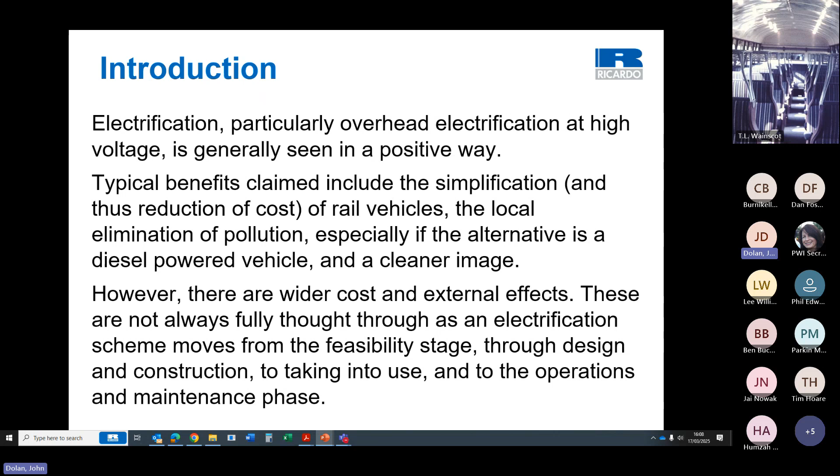However, there are wider cost and external effects. These are not always fully thought through as an electrification scheme moves from the feasibility stage through design and construction to taking into use and to the operations and maintenance phase.

Starting with implementation issues. Typically, physical implementation requires significant disruption to train services over months, if not years. This can destroy the rail market on the route and thus, potentially, electrification's own business case.

For example, electrification of one commuter route required the suspension of evening and weekend services, forcing passengers to use alternative modes of transport. As the electrification works coincided with the recession, those other modes were not crowded, and there was a degree of modal shift away from the railway that took a long time to recover.

Although it is now the practice to install signalling assets that are designed to be compatible with future 25 kV overhead electrification, this was not necessarily the case in the past. Therefore, where electrification does not coincide with resignalling, there can be a significant amount of work for the immunisation of the existing signalling, including, in particular, changes to track circuits.

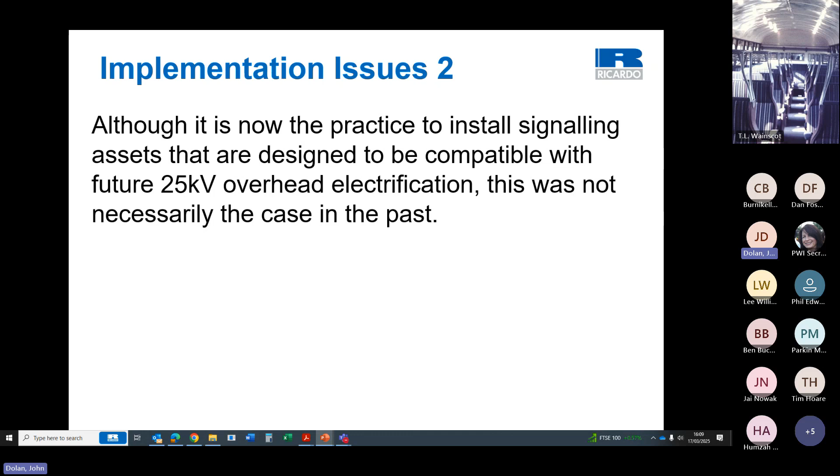The design life of a bridge is typically of the order of 100 to 120 years. Some forms of bridge, such as brick and masonry arches, can, if the foundations are not disturbed, last much longer. When electrification requires the reconstruction of bridges, it has to be recognized that there is a cost in environmental terms of destroying bridges with decades of remaining life.

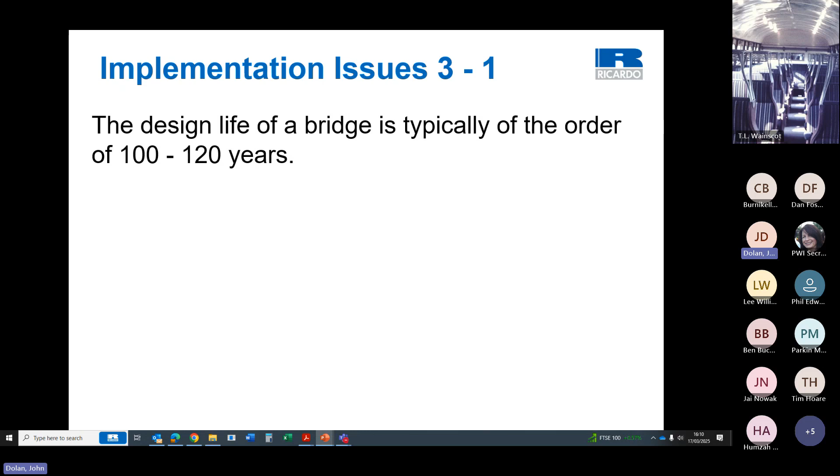There does seem to be some potential for a former practice. The London, Brighton and South Coast Railway electrified much of its suburban service in the early years of the 20th century, using a 6.7 kilovolt AC overhead system. To avoid reconstructing certain bridges, there were dead lengths of contact wire.

This concept is now being promoted as an innovation, although recent experience is still limited. The trains could deal with quite a long dead section. Up to 60 metres is recorded in Hamilton Ellis's The London, Brighton and South Coast Railway.

Great Western electrification introduced the concept of combining surge arresters and insulating coatings at the Cardiff intersection bridges, avoiding difficult reconstructions. It will be interesting to see how the coatings perform over the years and how often they have to be refreshed.

In that context, there is also a need to ensure that the insulating coating or an equivalent remains on the market. Incidentally, this is now a standard Network Rail solution and has been used recently on a lot of structures on the Midland Main Line.

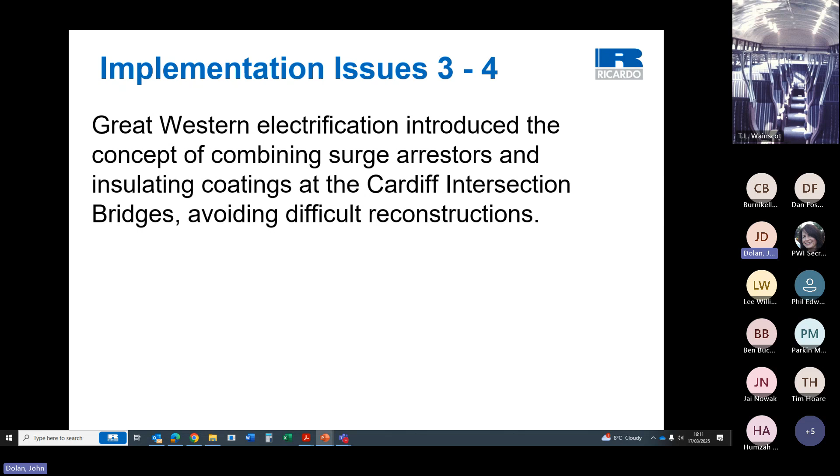So these are some images of the GLS coating and the NR accepted surge arrester. It's taken from material supplied to Ricardo Certification. We were the assessment body. In fact, I was the assessor in support of Network Rail's safety justification.

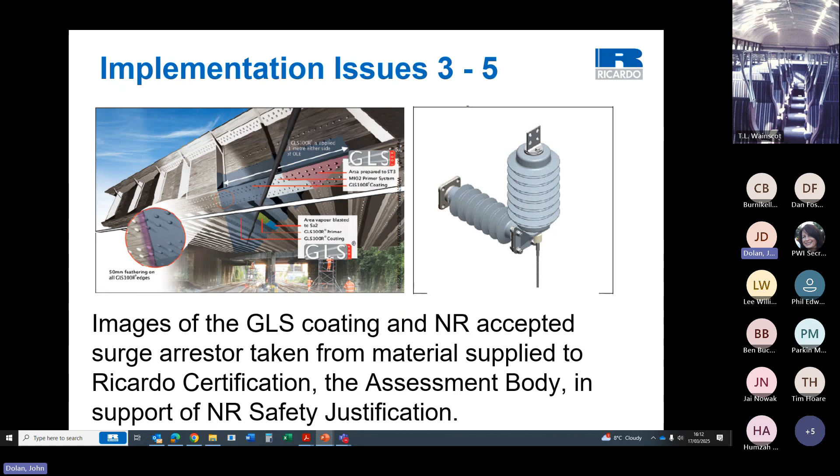One alternative to bridge reconstruction is track lowering, where, as is often the case with older bridges, the abutment design relies on the presence of passive earth pressure on the lower face of the abutment for stability. The abutment needs to be underpinned. Unfortunately, there is usually also a need to modify the drainage to avoid the creation of a sump.

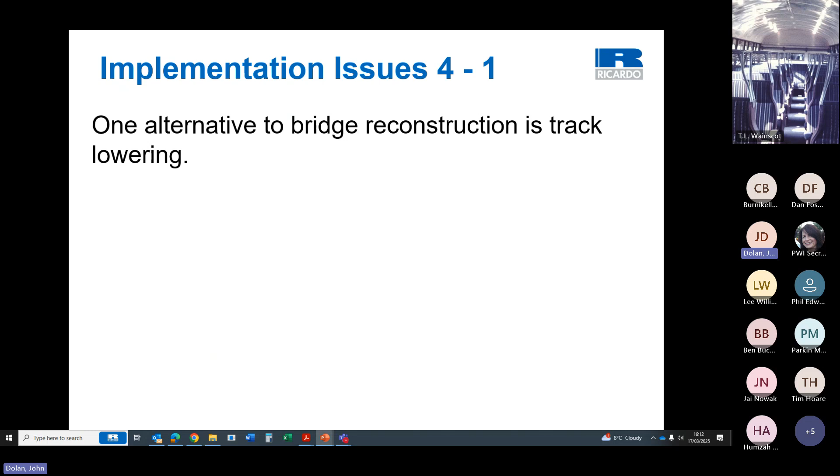Track lowering adversely affects the track top profile. On a higher speed line, there is a need for long run-ins and run-outs to comply with the relevant design parameters and to avoid the creation of a permanent speed restriction.

This work inevitably requires possessions longer than the maintenance white periods and, not infrequently, temporary speed restrictions whilst the new track profile is created. As with bridges, there is a cost in environmental terms of changing an existing asset configuration with remaining life, generating ballast and track waste.

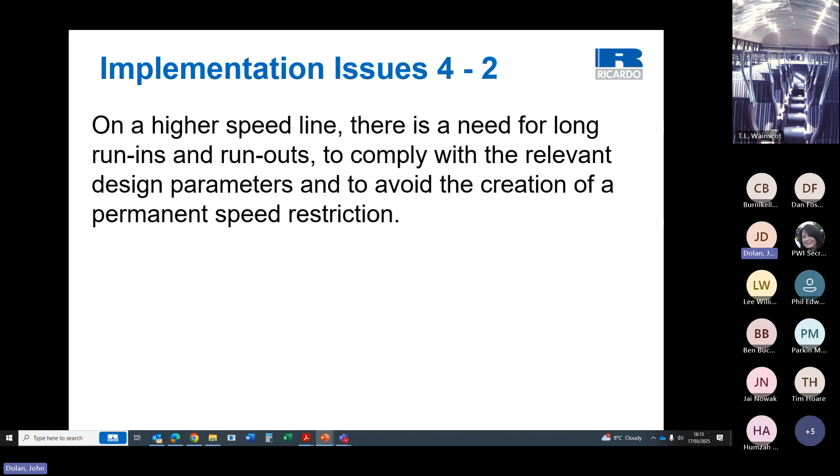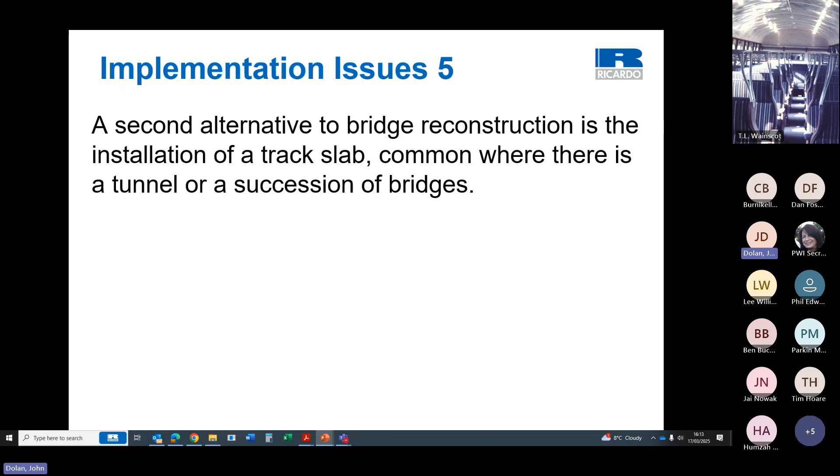Electrification also requires a significant earthing and bonding exercise. It is necessary to consider all existing metal structures, including footbridges, line-side fences, station furniture, etc. At metal bridges, the risk of dangerous touch potentials must be eliminated.

So moving on to the increased need for on-site work. Whilst rolling stock can be maintained offline in warm, covered accommodation, protected from the weather, with plant, tools, support, etc. to hand, electrification assets have to be maintained at height, often at night and in the pouring rain, and in winter in the freezing cold. This makes achieving quality difficult and introduces additional safety risks, and if problems arise, support is remote.

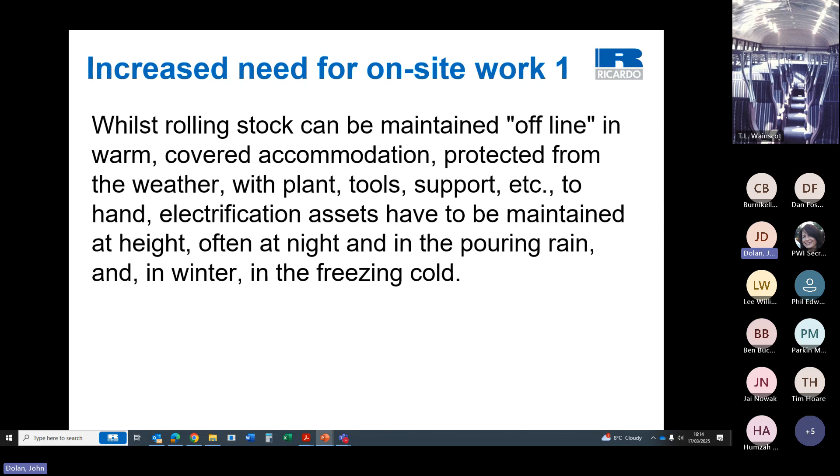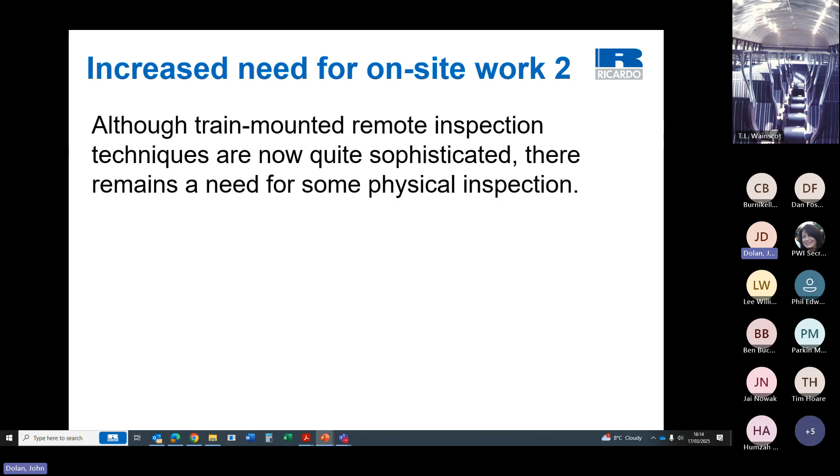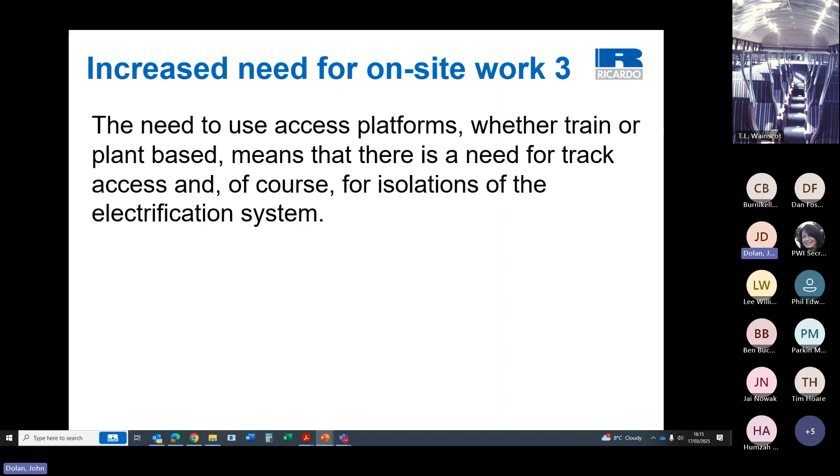Although train-mounted remote inspection techniques are now quite sophisticated, there remains a need for some physical inspection. The same issues arise as for maintenance. The need to use access platforms, whether train or plant-based, means that there is a need for track access and, of course, for isolations of the electrification system.

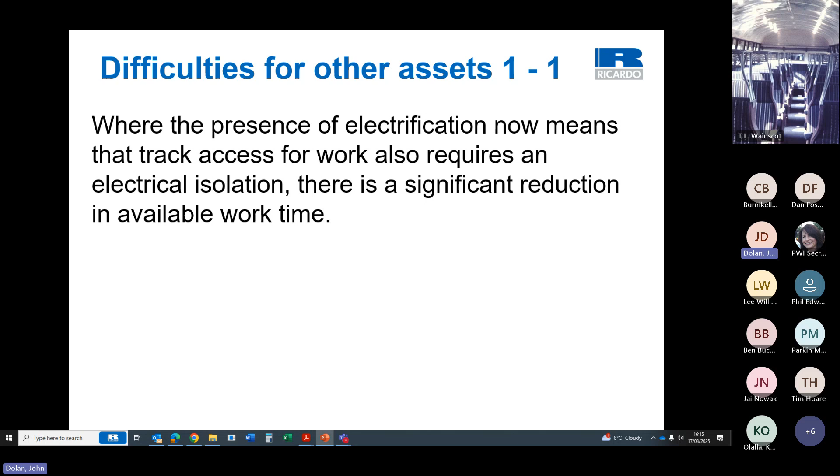Difficulties for other assets. Where the presence of electrification now means that track access for work also requires an electrical isolation, there is a significant reduction in available work time. It is not the isolation itself that takes the time. This is merely a matter of switching. It is the need to secure against re-energization and to apply earths.

There is a common misconception that the requirement to apply earths during an isolation is to deal with the possible presence of induced voltages due to adjacent live electrical equipment. While it is true that such voltages do occur and are sometimes remarkably high, in the thousands of volts, this is not the primary reason for the application of earths.

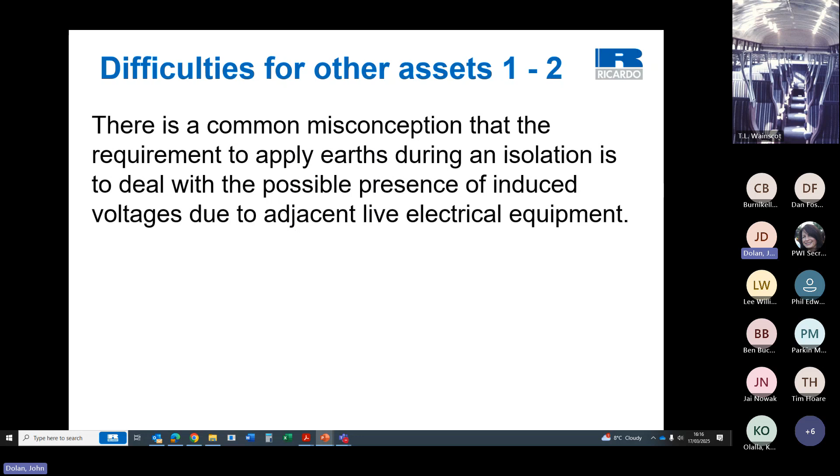The primary function of the earths is to provide the security of the isolation from inadvertent re-energization as required by Regulation 13 of the Electricity at Work Regulations, SI 1989/635. Until the earths are applied, the overhead electrification equipment can only be said to have been switched off in compliance with Regulation 12. And it's worth noting that the requirements of both Regulation 12 and Regulation 13 are absolute. The use of risk assessment to support an as low as reasonably practicable argument is not permitted.

Unless the switched off equipment is secured against inadvertent re-energization, it cannot be said to be isolated, and it would not be appropriate to issue any permit to work. It should be noted that the regulations have not been made as a result of European safety legislation, and that there are different electrical safety requirements in different European countries.

Permanent earths have been tried. They were used on the original British West Coast Main Line electrification in the 1960s. However, many earths were used very rarely and became unreliable due to dirt and corrosion, etc. It was found that a significant ongoing effort was required to ensure that they were 100% effective. Hence the current normal practice of designated points to facilitate earth attachments, although quite a lot of work is going ahead at present to try to demonstrate that alternatives to the original permanent earths are successful.

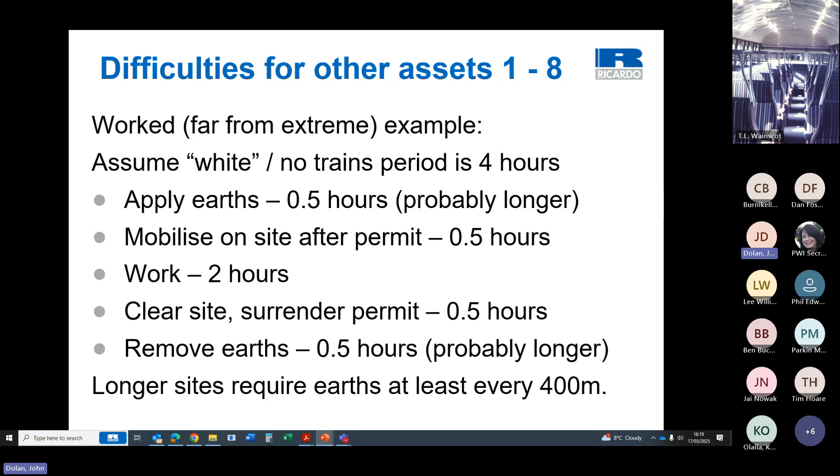This is a worked and far from extreme example. We're assuming the white period, the no trains period, is 4 hours. So you're applying the earths, half an hour, could well be longer. You then have to mobilise on site, half an hour. You get 2 hours work, and then you have to go through the process again, making sure everybody's off, surrendering the permit, that half an hour I've said, and remove earths, half an hour. And longer sites require earths at least every 400 metres.

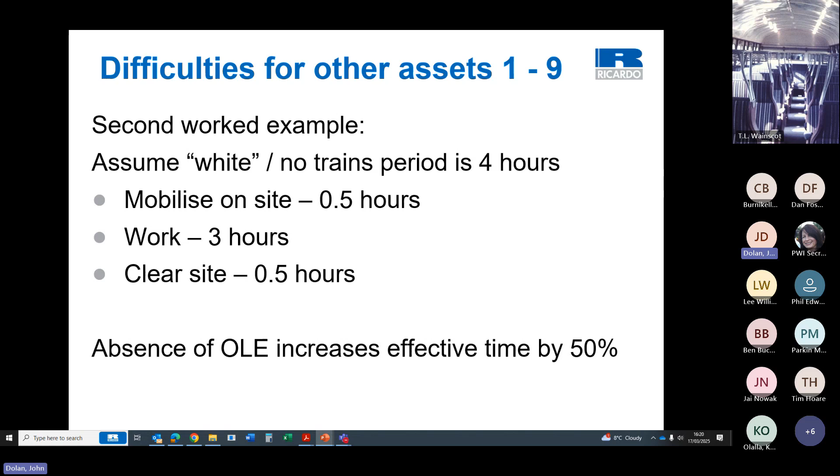Second worked example, without isolations. Mobilise on site as before, half an hour, and clear site half an hour, but now you've got 3 hours for work. So in a 4-hour white period, you've increased your effective time by 50%.

It's also an issue, but perhaps less so, for conductor rail electrification. The Electricity at Work Regulations led to much greater use of short circuiting straps, but these are easier to attach than OLE earths. In addition, many OLE routes are mixed traffic and without electrified diversion routes. Conductor rail track is often on commuter routes or multi-track main lines, many with electrified diversions. Extensions to white periods are therefore easier to agree.

As noted earlier, the overhead electrification asset requires track access for inspection and maintenance activities. This means that for those wishing to carry out maintenance and inspection work on other assets, including track, signalling and structures, there is an increase in competition for track access to carry out that work.

Where a line is electrified on the overhead system, track must be maintained to tighter tolerances. This is particularly important for cross-level, as the effects at track level are typically multiplied 3 times at contact wire level. Care must also be taken over the maintenance of top to avoid affecting contact wire gradients, and of alignment. On straight track, the contact wire is arranged in a zigzag pattern to minimise the risk of wearing a groove in the pantograph contact strip. On curves, the contact wire takes the form of a series of straights.

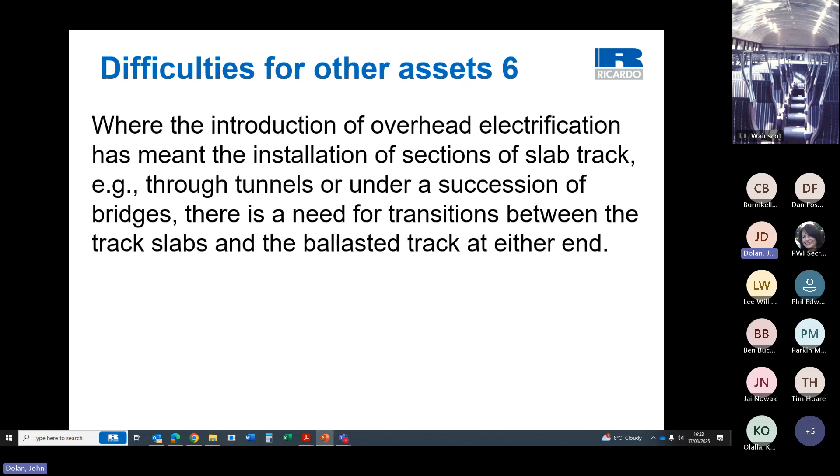The need to maintain 3.5 metre clearances to live overhead line electrification equipment, and we're not just talking about the contact wire, complicates the maintenance and cleaning of station structures, particularly platform canopies. Where the introduction of overhead electrification meant the installation of sections of slab track, for example through tunnels or under a succession of bridges, there is a need for transitions between the track slabs and the ballasted track at each end. Because of the varying degree of rigid support, the transition is difficult to maintain, with additional attention, and thus requirement for track access, having to be paid to cross-level and top.

There is a need for additional vegetation management, particularly where there is a risk of tree branch contact with unsheathed return conductors, requiring further additional track access and isolations. And this was one of the big problems on the Rugby Birmingham Wolverhampton Stafford line. Vegetation in the deep cuttings was a major issue, keeping it away from the return conductor. It's a single point of failure.

Overhead electrification introduces a new failure mechanism for the railway, in that a loss of power immobilises the train, whatever the state of the non-electrification engineering assets. Accordingly, many suggestions for mitigating electrification failure consider how power can be brought to the train. However, a failure of the mechanical electrification system is unlike the other engineering assets. There is essentially a single point of failure which cannot readily be mitigated to allow trains to pass and clear the line.

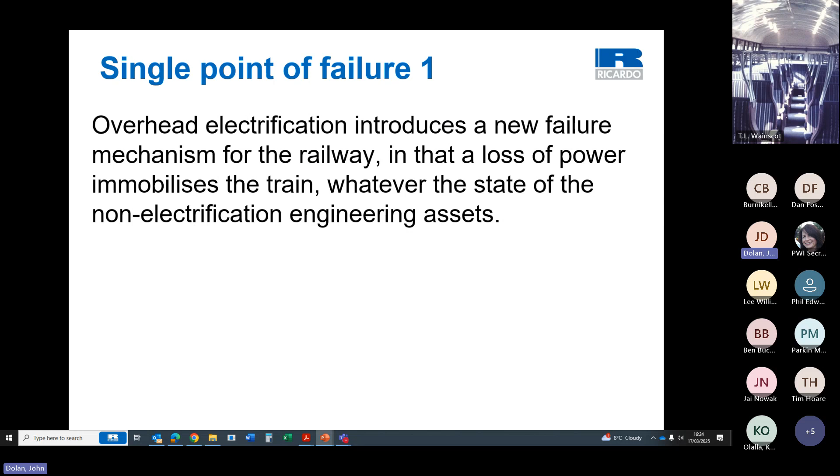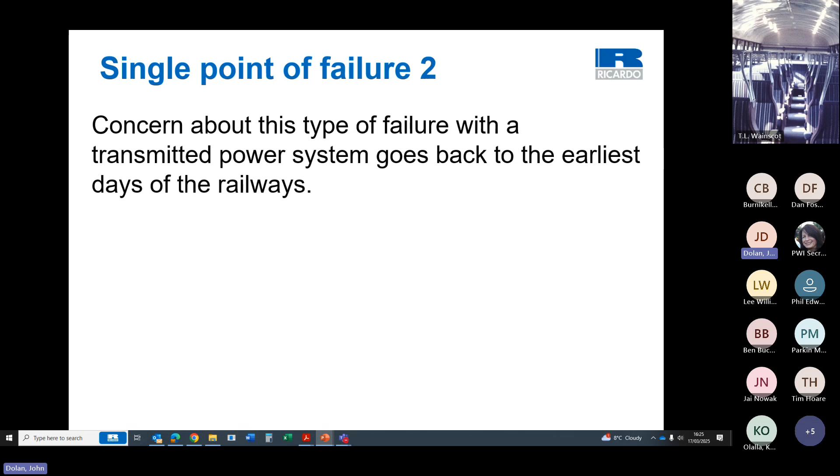Concern about this type of failure with a transmitted power system goes back to the earliest days of railways and the debate amongst the proposers of the Liverpool and Manchester Railway about whether cable haulage or locomotive haulage was the way forward. And similar discussions of principle surrounded the atmospheric system. In many situations, a failure of the catenary system or a headspan means that the clearance required to pass trains is infringed. This affects non-electrically powered trains as much as electrically powered trains, although the non-electrically powered do have hotel power whilst waiting for the situation to be resolved.

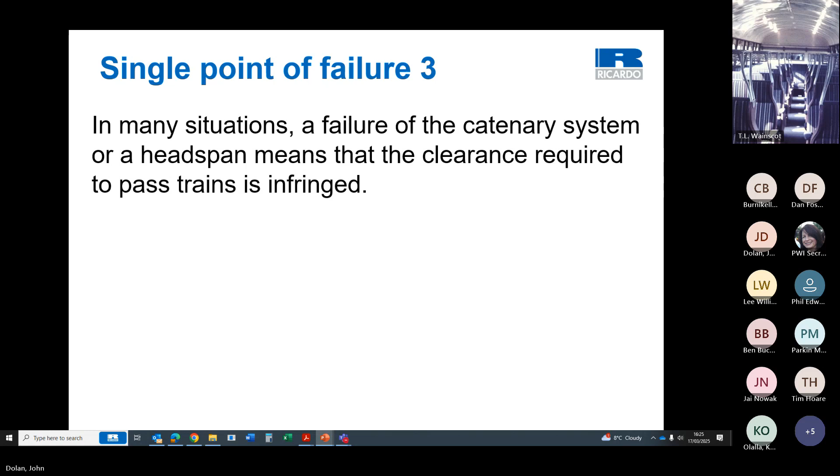Objects blown onto the railway obviously cause the suspension of train services whilst they are removed. However, where the line is electrified, there is an additional likelihood that, for example, plastic sheets will be caught, and then an additional problem in that the removal requires the electrification to be isolated and made safe before the object can be removed, increasing the time required significantly. I'll come back to this one.

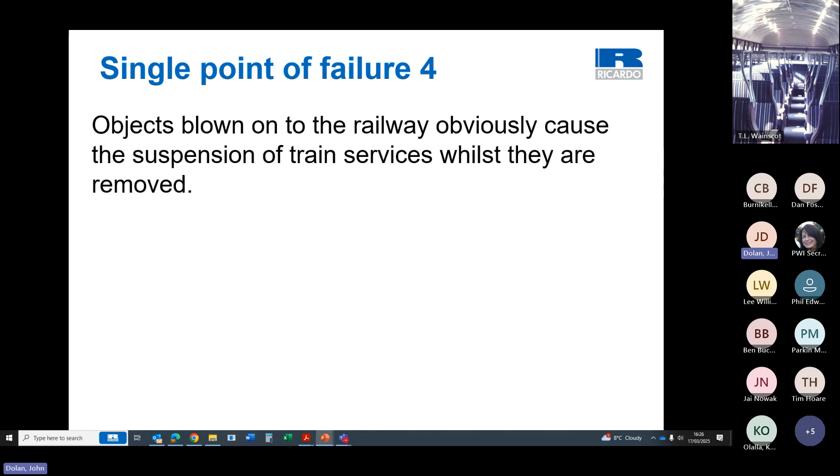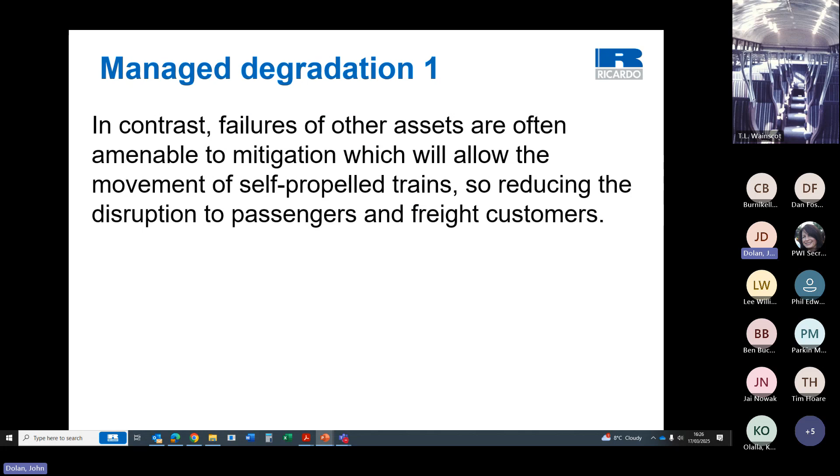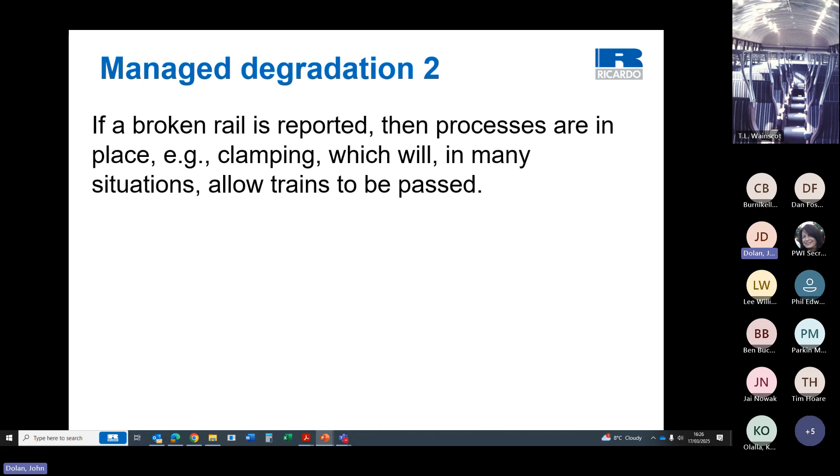Managed degradation. In contrast, failures of other assets are often amenable to mitigation, which will allow the movement of self-propelled trains, so reducing the disruption to passengers and freight customers. If a broken rail is reported, then processes are in place, for example clamping, which will, in many situations, allow trains to be passed. This may possibly mean the train moving at walking pace and with inspection required after every movement over the break, but at least movement is possible.

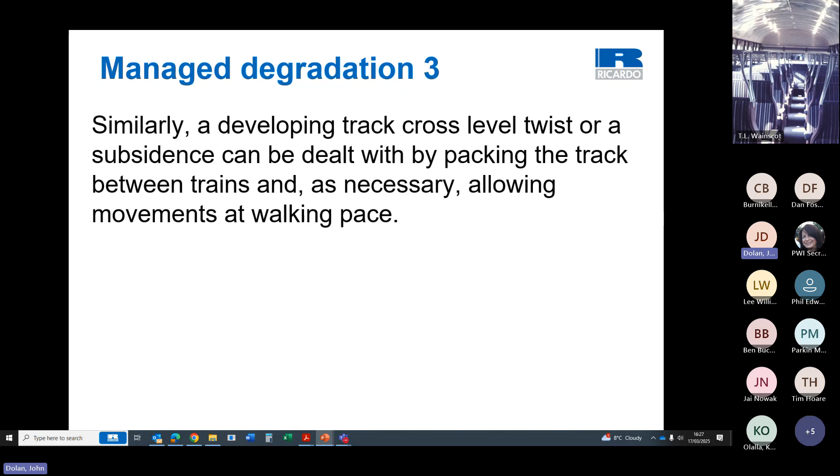Similarly, a developing track cross-level twist or a subsidence can be dealt with by packing the track between trains and, as necessary, allowing movements at walking pace. However, this may not be possible where there is overhead electrification because of the need to maintain the pantograph/contact wire interface within tolerance. When the track has buckled, it is possible, if space is available, to slew the track to form reverse curves that will allow movements at slow speed. However, this may not be possible where there is overhead electrification, again because of the need to maintain the pantograph and contact wire interface within tolerance.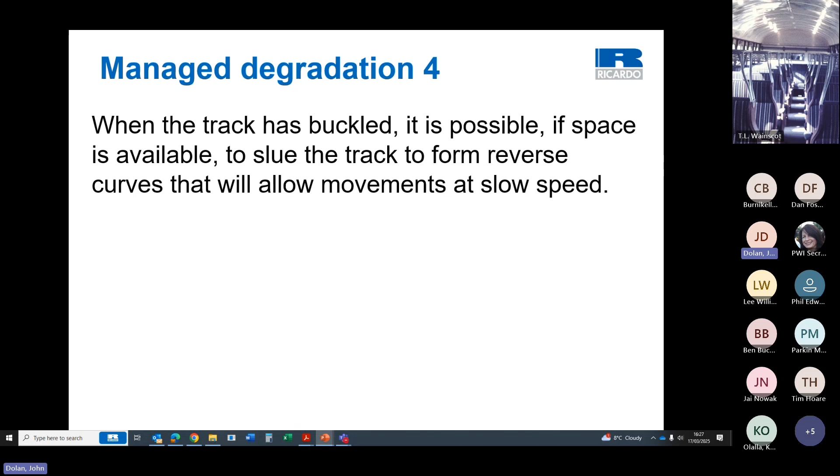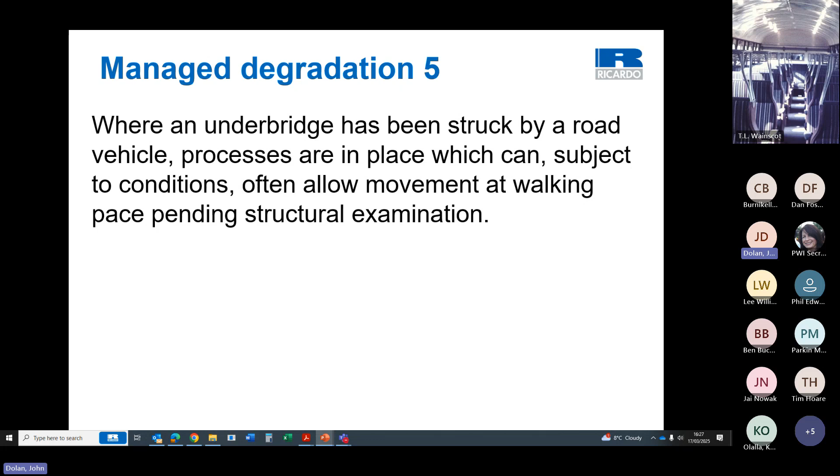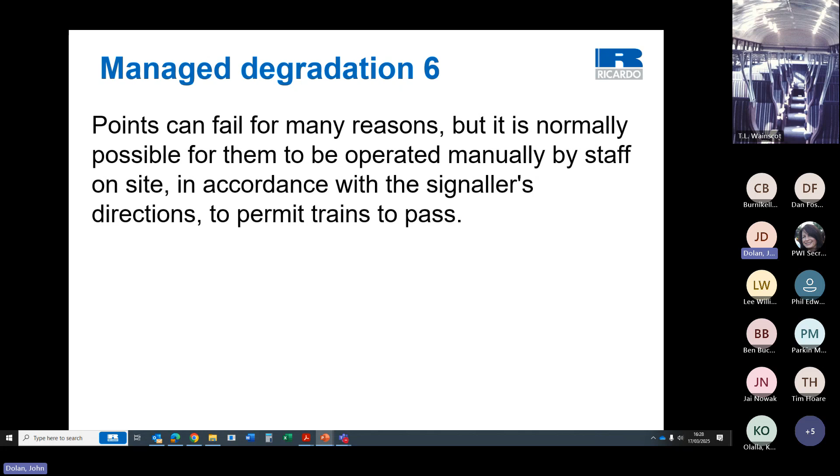Where an underbridge has been struck by a road vehicle, processes are in place which can, subject to conditions, often allow a movement at walking pace pending structural examination. Points can fail for many reasons, but it is normally possible for them to be operated manually by staff on site in accordance with the signaller's directions to permit trains to pass.

When the control system fails, various mitigation measures can be introduced, depending on the nature of the failure. Movements may be authorised through a section at caution, or station-to-station working may be introduced. If the failure is likely to remain for an extended period, ticket working may be practicable. If the signalling fails on a single line, pilot working is introduced, in which a clearly identified person effectively acts as a human staff.

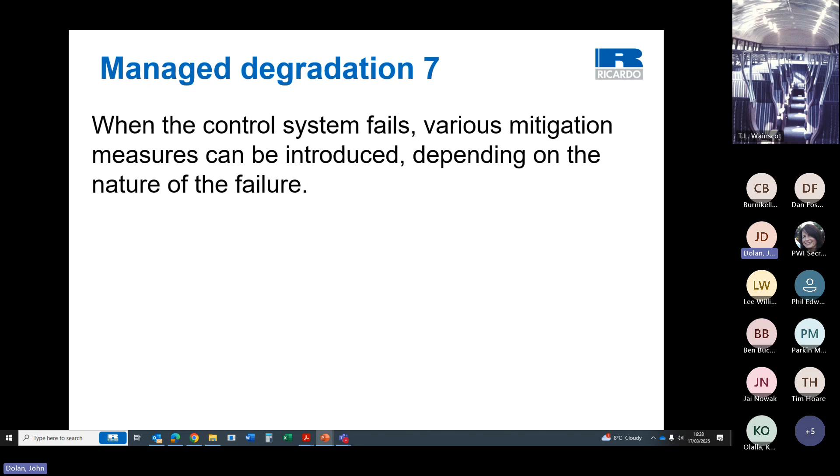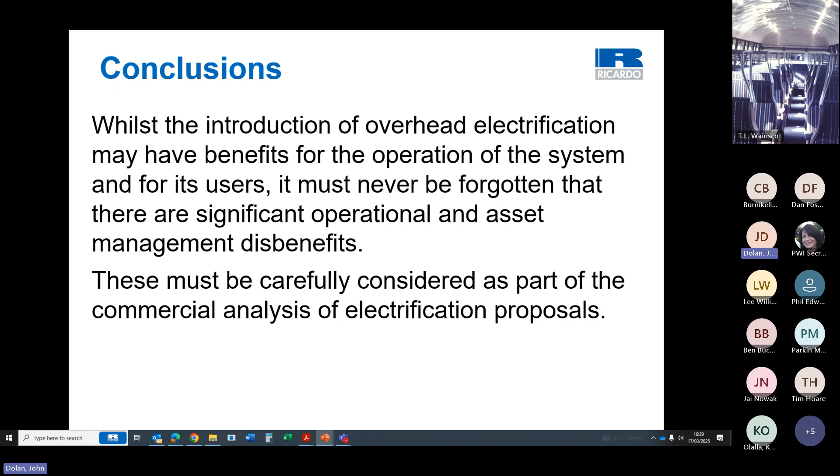So, whilst the introduction of overhead electrification may have benefits for the operation of the system and for its users, it must never be forgotten that there are significant operational and asset management disbenefits. These must be carefully considered as part of the commercial analysis of electrification proposals.

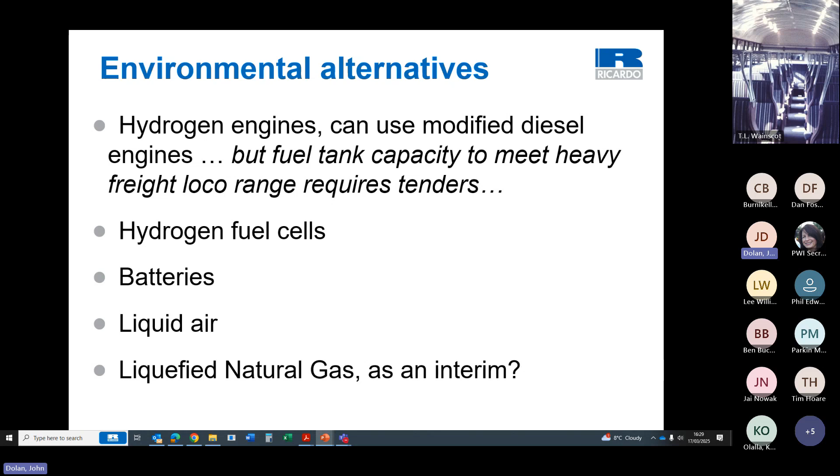So, what are the environmental alternatives? Hydrogen engines can use modified diesel engines, but fuel tank capacity to meet heavy freight loco range requires tenders. You'll see that on the next slide. You can have hydrogen fuel cells, batteries, liquid air, and potentially liquefied natural gas as an interim.

Not an alternative. Some of you may recognise the image on the left. It's what was called a brake tender. And it was used to increase the braking capacity when diesel locomotives were introduced and trains were moving at somewhat higher speed than steam to help control partially or unbraked freight trains.

An initial thought, when Ricardo carried out some work on hydrogen for freight in early 2021, was that the hydrogen would go into a vehicle about the size of a brake tender, which, as you can see, allows the driver visibility over the tender, so can see the signals and everything.

However, hydrogen is not a high energy fuel. The initial thought, as I say, was something the size of a brake tender, but calculations showed that the tank wagon in the right photograph was not actually enough for current ranges. Even though it's a huge tank wagon, it wouldn't allow a diesel engine to do anything like the same range as the current diesels do.

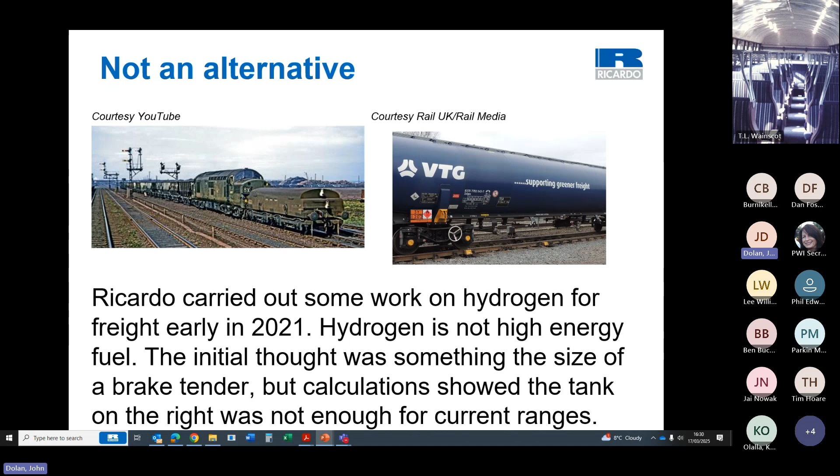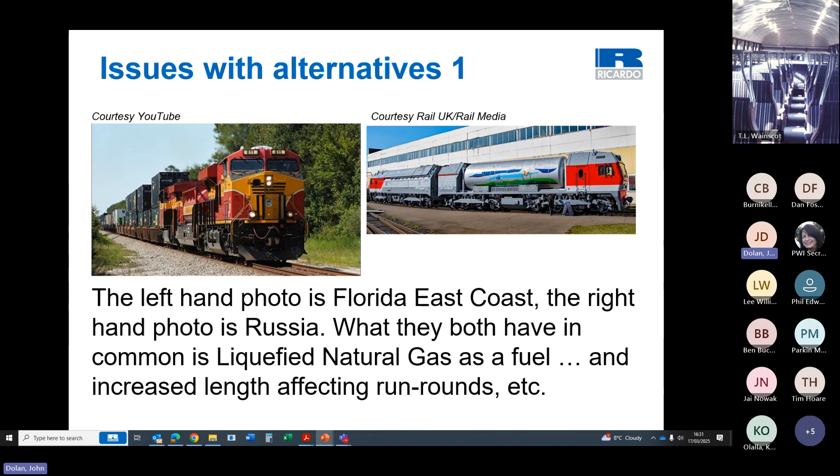There's also issues with the supply of hydrogen. Train operators in Germany are withdrawing hydrogen-powered trains due to difficulties in maintaining an adequate supply. That was in Modern Railways in February 2025.

And bus operators in England have been refused permission for hydrogen storage as, for a fleet of 97 buses, the 5-tonne facility required is a COMAH, control of major accident hazard sites, and the HSE advised the council concerned against granting planning consent. So there's 97 buses on order, but no way of using them as hydrogen buses. And that came from the Chartered Institute of Logistics and Transport magazine last summer.

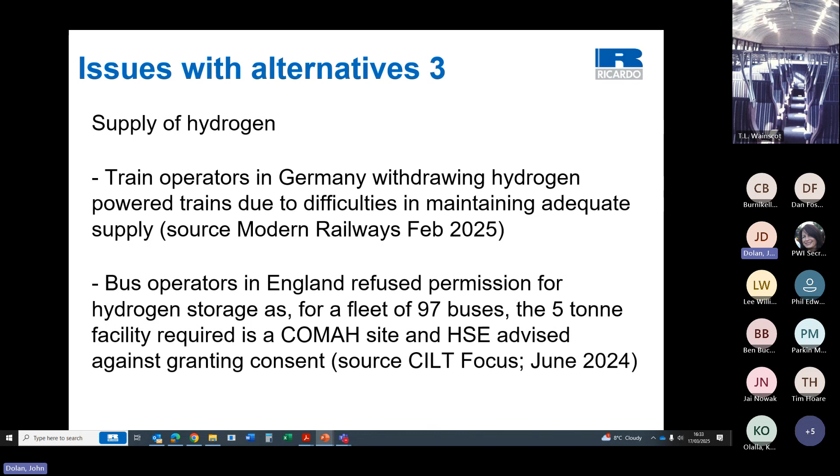That's a major problem to be sorted before there's a major rollout of hydrogen buses, because most COMAH sites where you want to stable buses are going to be close to things that HSE might be concerned about.

There is a non-environmental alternative. After many years, the line from Preston to Blackpool was electrified, allowing for electric trains to run all the way from London. The trouble is that after it was electrified, Virgin first and then Avanti continued to use the Voyager diesels. And there were two here that I was travelling on, and I was just so depressed by the fact that after all the electrification, people were running 226 miles in a diesel under the wire all the way.

So, back to the castle. One of the prompts for this presentation was an incident on a journey from Bristol to London. I was in a HST. The electrification at that stage only extended as far as the junction for Heathrow Airport. And about 5 o'clock, we came to a stand at Slough. And the conductor opened the doors and he said, "Don't wander very far." But obviously an indication people could use it as a cigarette break. He said, "There's problems with the OLE on the way to Paddington. We expect to be here for about half an hour."

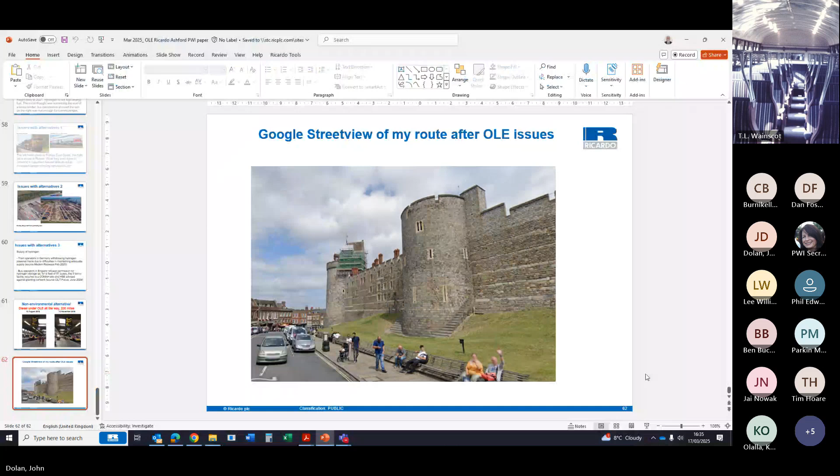And then along the pavement to the left of this picture, there was a stampede of people jog-trotting along the foot of Windsor Castle to Windsor and Eton Riverside. And I was thinking, as one of the people doing the jog-trot, I've been sat on a HST which has got no problem with it. There's no problem with the track, no problem with signalling, but there's a problem with the OLE. So there we go. So, thank you.